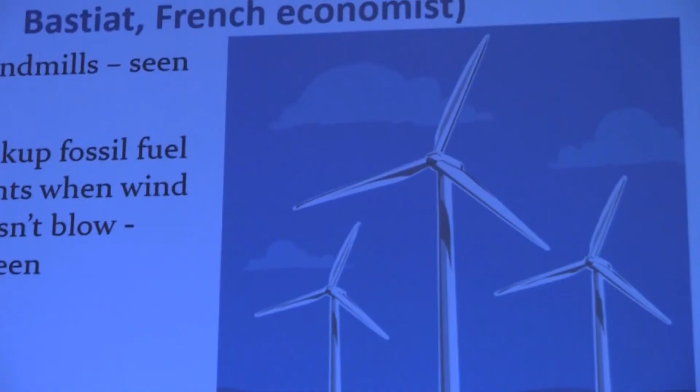Now, the key to my talk is, are we actually reducing CO2, carbon dioxide, by using renewables? It's received wisdom that if we build solar collectors, wind turbines and the like, that we will reduce CO2 and maybe reduce the effects of global warming. Has this been proved? I don't think so.

Now, I use as my guideline some of the work of Bastiat, the French economist of the 19th century, what is seen and what is not seen. Quite often in human affairs, we see something, but we do not see the unintended consequences, or what is not seen. He used the example of a little boy who breaks a window by throwing a rock through it.

The glazier comes, he replaces the window, and this increases gross domestic product because money changes hands and so on. But what is not seen is what the glazier would do if the window was not broken. He would go and install windows in new houses or replace other windows. The gross domestic product would be about the same.

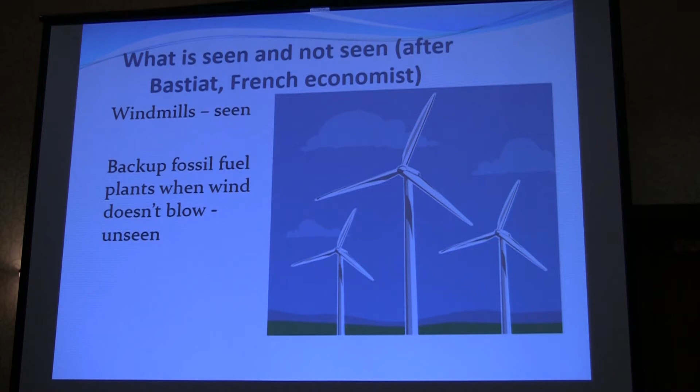So the question of this paper is, how much CO2 reduction will we achieve by using renewable energy sources? Now, of course, renewable energy sources encompass a wide variety. We're all familiar with solar and wind, but there's biofuels and other forms.

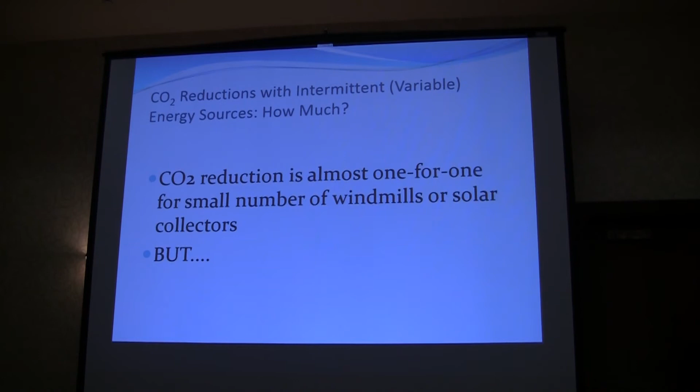Now, if you have a small number of solar collectors or windmills, you're actually reducing CO2 almost on a one-to-one basis. In other words, if you are just having a small installation, you're actually reducing CO2 by the amount of energy. Let me retract that. You're reducing CO2 production by the amount that is replaced by the solar or wind.

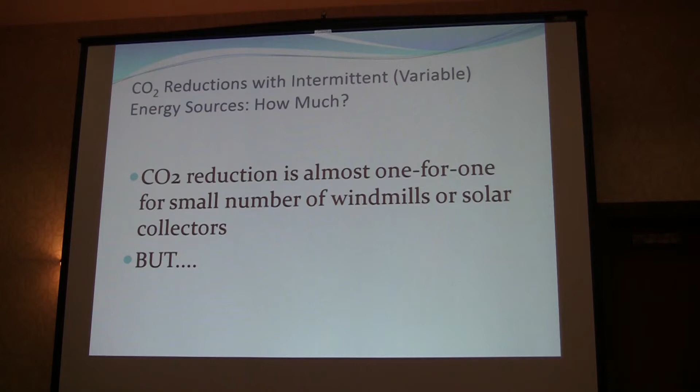But what happens when fossil fuel backup is turned on and off? In other words, the familiar problem, you've probably heard this phrase 10,000 times, when the sun doesn't shine and the wind doesn't blow, what do you do?

Here's a simple analogy. I generally think in terms of analogy. Consider the best-selling car in 2011, the Toyota Camry, at least in the United States. The mileage on the highway is approximately 33 miles per gallon. The mileage in the city is about 22 miles per gallon. This implies a ratio of 1.5, 33 over 22, which is not too different from most cars on the road.

Now, who are the highway drivers? These are people who spend all their time on the highway.

They only stop to go to the bathroom or buy some snacks. People in the city, you could think of taxis. They never go out on the highway, or almost never. They are continually stopping and going. That is why...

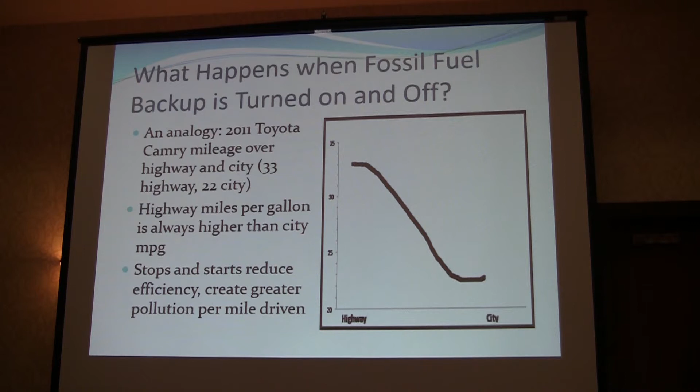Now, most people have not seen gas turbines, which are the backup for wind and solar. Most people have not seen them turned on and off, unless you're an electrical engineer or a manager for a public utility. But everyone has seen a lawnmower start. At least we're not talking about electric lawnmowers. Gasoline lawnmowers are by far the greatest proportion of lawnmowers. In almost every case, you're going to see a big burst of pollution when it starts.

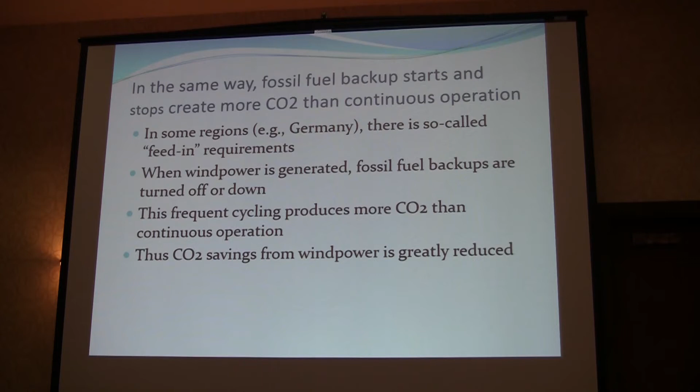So the key point I'm making here is when you have an intermittent source like wind or solar, the CO2 savings are vastly reduced as penetration increases.

Now, people have said, and you may have heard this argument, when the wind isn't blowing in one area, maybe it'll blow in another area, and we can average it out by transmission lines and so on. If the wind is not blowing in New York City and it's blowing in Houston, maybe somehow we could send it to New York, although I don't think Texans would really appreciate that.

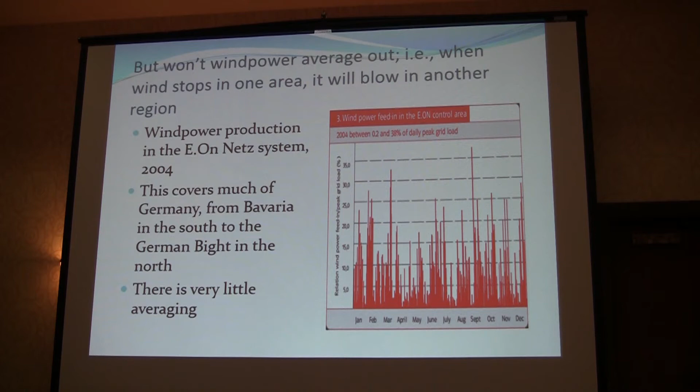Now, one of the key questions is, can we store energy? This is one of the main drawbacks of a number of renewable energy forms. Now, biofuels have self-storage. Hydropower has self-storage. In other words, by definition, hydropower is a storage system. There have been various attempts to store energy.

There are only 17 such systems in the United States. A very tiny proportion of any excess wind power or solar power is handled this way. In principle, it could even out wind variability, but these are very tiny in comparison to electricity demand.

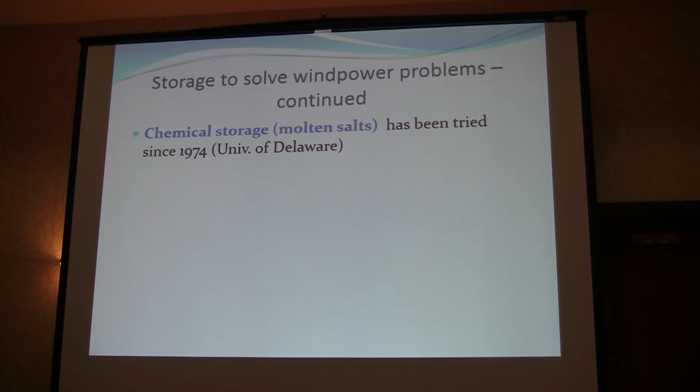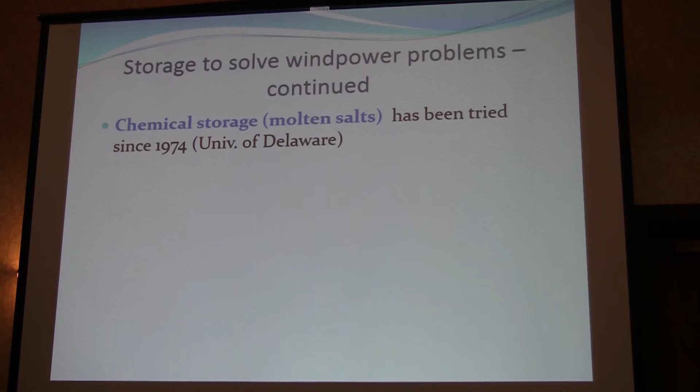People have proposed chemical storage, so-called molten salts. This goes back to 1974 when the first experiments were done in the University of Delaware. Through the courtesy of Nevada ratepayers, they are building a molten salt facility in a place called Tonopah, which is in the middle of Nevada. But these are very expensive, and you lose a lot of energy in melting the salt and getting the energy out of the salt. So it has never proved commercially feasible. But on paper, and of course chemists love this, it could be viable, but the cost would have to come down considerably.

The lead acid battery—people who have read the Whole Earth Catalog of the 1970s know some of the hippies wanted to build their own windmills and solar collectors, get off the grid, get away from those evil public utilities.

They had to store the energy somehow. The lead acid battery was used, even though there's all kinds of environmental problems with disposing of them. That's another story. These are still, after 130 years, the cheapest battery per energy stored, based on the chemistry. They were invented by Planté in France about 130 years ago.

We have more efficient batteries. We do not have cheaper batteries. Again, if you're talking about powering a whole city or even a small town, the cost would be prohibitive for storing energy if

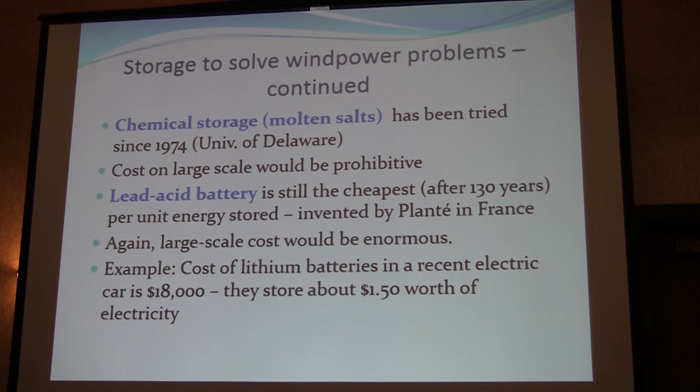you depended on wind or solar. Okay, the lithium batteries, very expensive. The Nissan Leaf, about $18,000 worth of batteries, holding about $1.50 worth of electrical energy. So I don't think we're going to use batteries to power a city or town. Maybe a house, if people are willing to spend the money.

Now, this is all theoretical so far, but if you read my paper, and I have about 10 copies of the paper over here, as well as 2 or 3 copies of the slides, there are actual experiences where people have measured how much CO2 is actually saved. And the paper has many references. I won't go into all the details. There was the Colorado study by Bentek about 2-3 years ago. As I said, all the references are mentioned in the paper,

which shows if you have a small number of windmills, you're saving the appropriate amount of CO2. That is, when the penetration is small, you're actually saving CO2, but just for a small number of windmills, 1, 5, 10, 20. But in some countries, they have much greater penetration of windmills. And by the way, the vertical scale is logarithmic. It's a little hard to read the numbers.

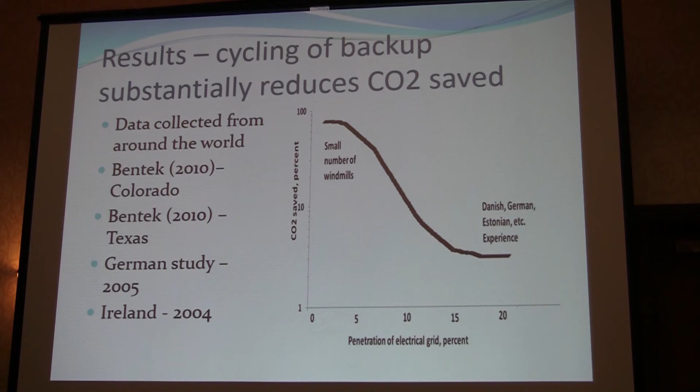The National Academy of Sciences, in a very obscure report, indicated that the amount of CO2 savings will be very small even if wind power is vastly used.

So this has tremendous implications for energy policy. There are other intermittent renewables such as solar photovoltaic and solar thermal. These are being built in Nevada as I speak. The ratepayers are paying much more than they would for coal energy. But this is one of the mandates that was instituted in the Nevada legislature by a Republican, Senator Townsend.

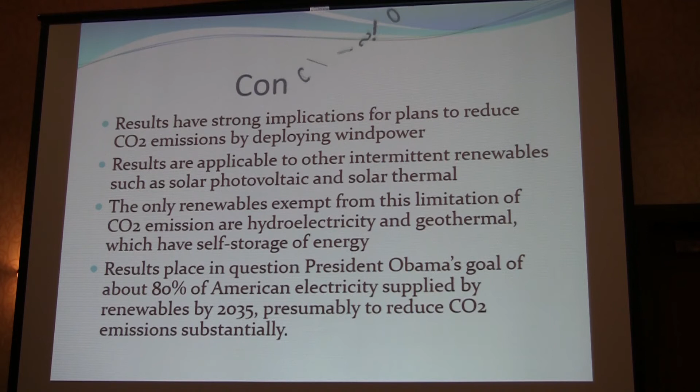These are my conclusions. So there are considerable uncertainties in that curve, which is the main point that I'm trying to emphasize. There are different types of fossil fuels. Obviously, coal produces more CO2 than natural gas, but natural gas produces approximately half the CO2 of coal for the same amount of energy produced.

A lot of literature is what I call polemic, trying to prove a point, as the previous speaker pointed out. It's partly a crusade, not so much a scientific story.

The degree of intermittency is going to affect the results. We saw that graph from Germany. You have different degrees of intermittency. At the Altamont Pass in California, you have fairly strong winds, not exactly continuously, but more continuously than many other places. But it varies considerably from place to place.

As Professor Hayden pointed out yesterday, whether you have open or combined cycle gas turbines will affect results. A lot of utilities do not supply data. I wrote to the Texas system to see where they have used an awful lot of windmills. Didn't get an answer. I said, how much CO2 are you actually saving? They couldn't answer it. Why is that?

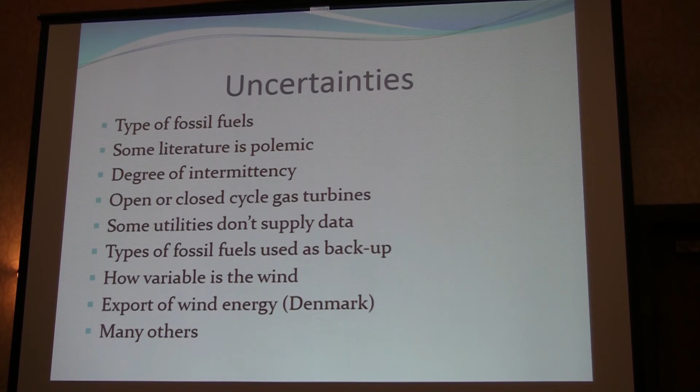So the energy is stored because Denmark happens to be close to Norway. They just send it across that sound, whose name I can't remember. And there are other uncertainties. But if you're exporting or importing wind energy or solar energy, this of course makes life a little more complicated in terms of calculations.

So, do we have an action plan to reduce uncertainties? In principle, regulatory agencies, public utility commissions in the United States, and electrical utilities should gather and analyze data on the, quote, missing CO2 reductions. In reality, they do not.

You will see statements by public utility commissions and electrical utilities that say we have saved so many thousands, millions of tons of CO2, on the assumption that every unit of wind energy is saving a certain amount of CO2, regardless of whether you have one windmill or 10,000 windmills. This is simply incorrect.

As I said, any expenditures on wind and other renewables are passed on to the consumer. They state that they're reducing CO2 emissions, but they fudge over how they calculate it. In fact, most of the time they don't give a number, they just say we are reducing global warming by reducing CO2 emissions. That's as far as they go. So consumers should know what reduction of CO2 they are getting for the increased costs. They do not know that now.

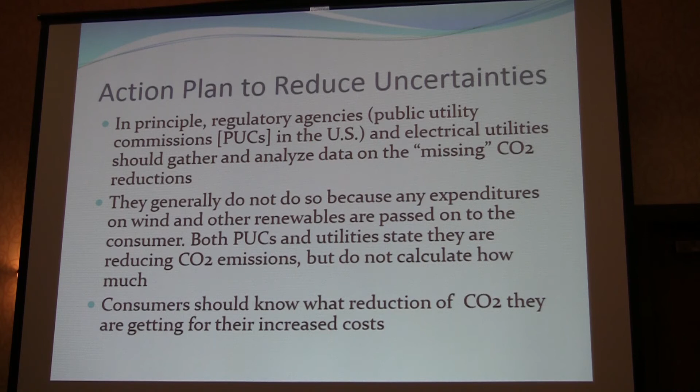In summary, the story of the tea bag label. And what does this have to do with wind? People who go down into the Grand Canyon on donkeys to see the bottom are told, reduce the load of what you carry as much as possible, because this is less strain on the donkey, you don't want to carry hundreds of pounds. One couple said, we are going to reduce the load by cutting off the tea bag labels. Was this futile? Get the analogy? Thank you very much.

Thank you, Dr. Inhaber. Very good presentation. I do agree with your conclusions and the thrust of your message.